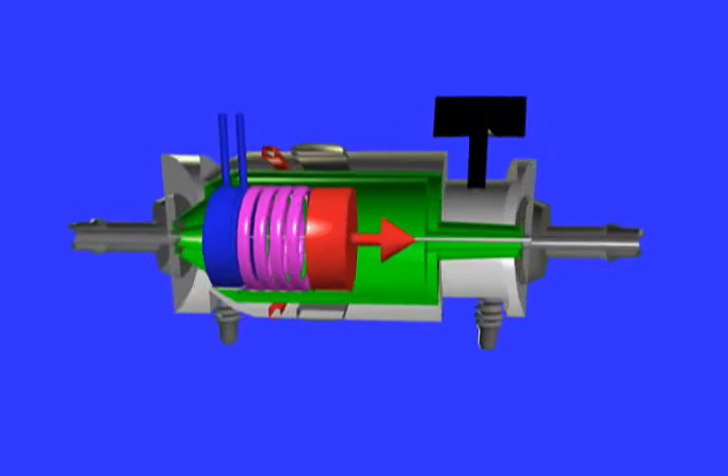The shift solenoid is an on and off electrical valve that lets fluid pass to actuate the actual gear shift. It is composed of the solenoid pintle, spring, and electric coil winding. If the coil winding shorts out and burns the wires, it is said to be an open circuit fault.

OBD2 transmission code definitions for the shift solenoid come in various flavors. These are solenoid performance, stuck on or off, electrical, and intermittent. It is important to know that if you have a solenoid performance or a solenoid stuck on or off code, you do not have an electrical fault.

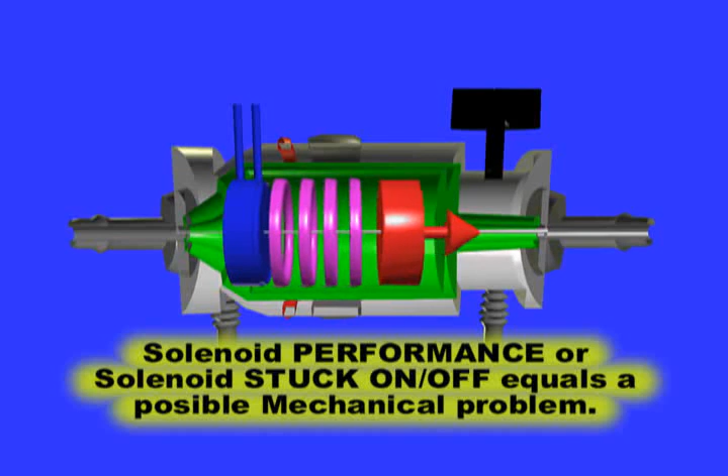You then must look at possible mechanical problems. But if your code definition is for an electrical or intermittent fault, you do have an open or short-circuited shift solenoid or circuit. All shift solenoids are mounted at the transmission valve body.

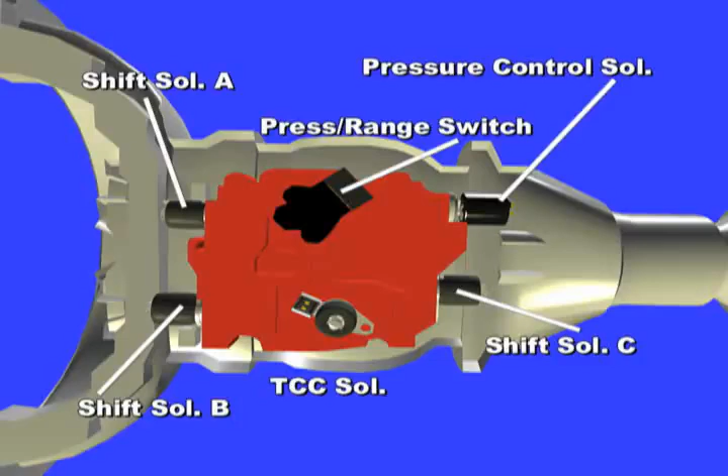A maximum of 4 shift solenoids may be used. Most transmissions employ 2 or 3 solenoids only. 80% of the time, these are on or off units. All domestic transmissions use ground-controlled solenoids, and all Asian transmissions use power-controlled solenoids.

On domestics, a relay or the ignition switch supplies power to all solenoids. Then, the ECM ground pulse is the other side of the solenoid. On Asians, one side of the solenoid is tied to ground at the body of the transmission, or using a separate wire connected to chassis ground. The other side is independently power pulsed by the ECM or TCM.

On fewer transmissions yet, the ECM controls the solenoid and therefore the shifting through duty cycle control units. With this system, both solenoid wires are connected to the ECM or TCM, which then employs a variable pulse width at a steady frequency to control the solenoid. The Dodge Chrysler family of vehicles uses duty cycle controlled solenoids. Do not ever apply steady power to a Dodge or duty cycle solenoid to test it, or it'll be destroyed.

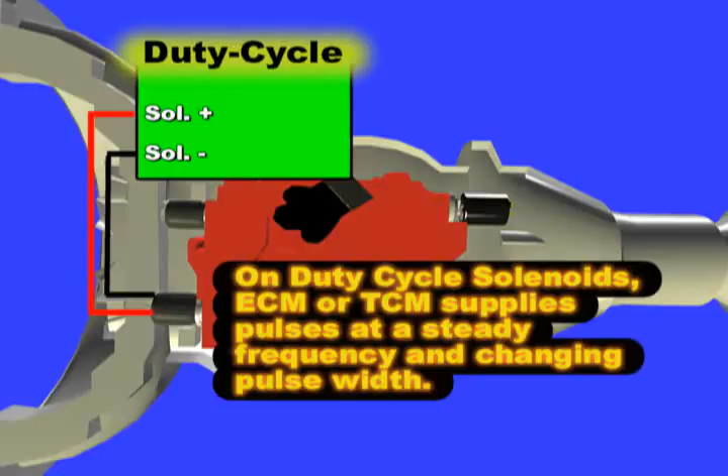To test the circuit on a ground-controlled system, turn the ignition switch on, then using a test light connected to ground, probe for 12 volts at the main transmission power feed wire, which feeds all solenoids. If no power, back trace to the fuse box, relay, or ignition switch.

If OK, and you are prompted with a shift solenoid electrical code, then using the same test light, also connected to ground, probe at the solenoid activation wire, and make sure you have 12 volts present. If not, then the solenoid is faulty. Use the transducer pod if necessary to detect this problem.

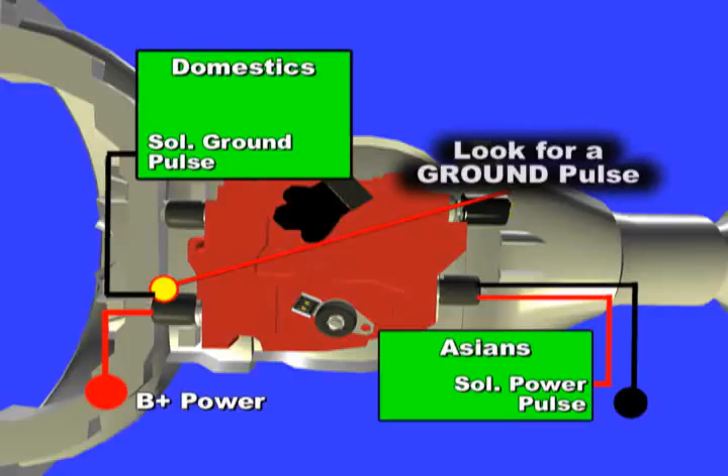To test the ECM or TCM, connect the test light to power, raise one tire off the ground, have someone else set the vehicle to drive, and probe for a ground pulse, right at the solenoid activation wire. If testing on a power-controlled transmission, simply reverse the test light connection. Most on and off shift solenoids will draw about 0.9 to 1.2 amps of current.

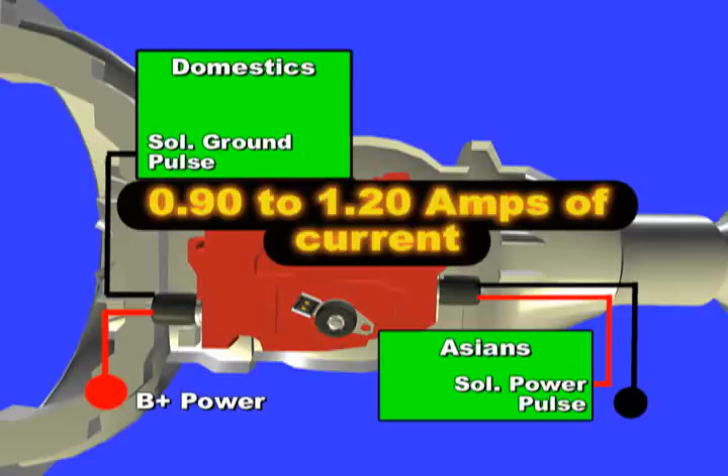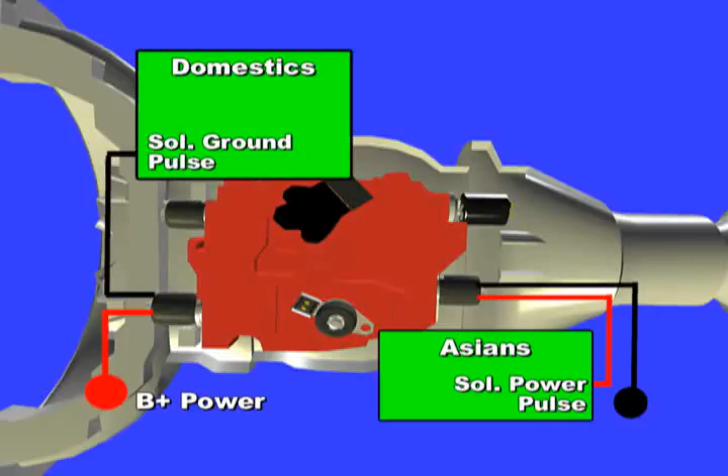Shift solenoid codes are very common. Do not replace or rebuild the transmission if you have an electrical or intermittent transmission code. Simply concentrate on the electrical side. A shift solenoid high code means that the circuit ground is missing. A shift solenoid low code means the circuit power feed is missing.